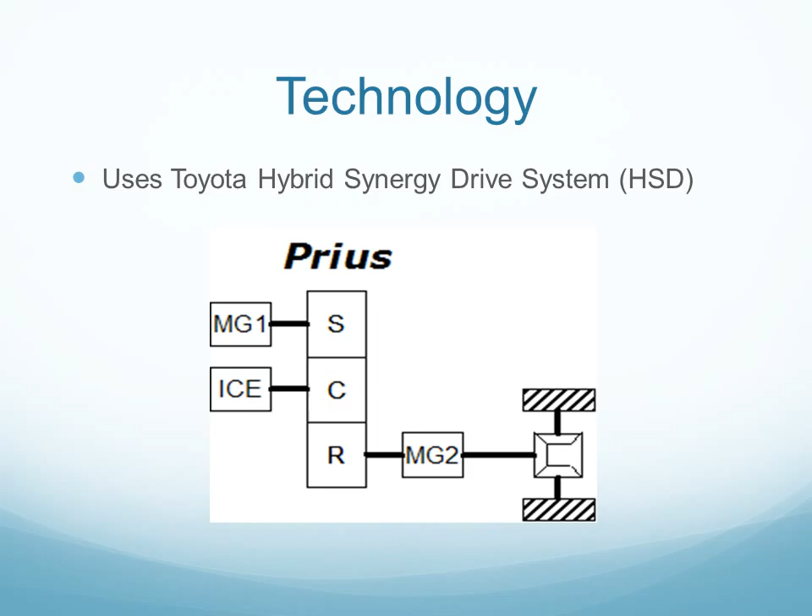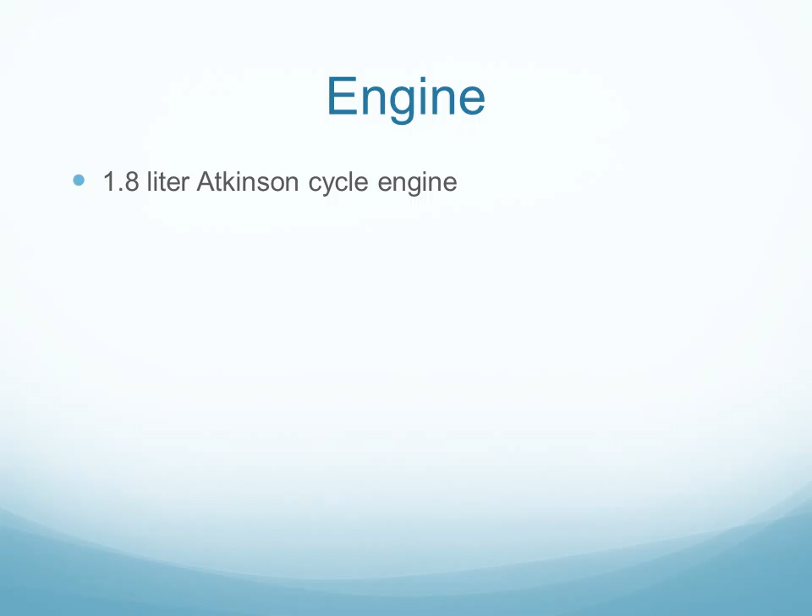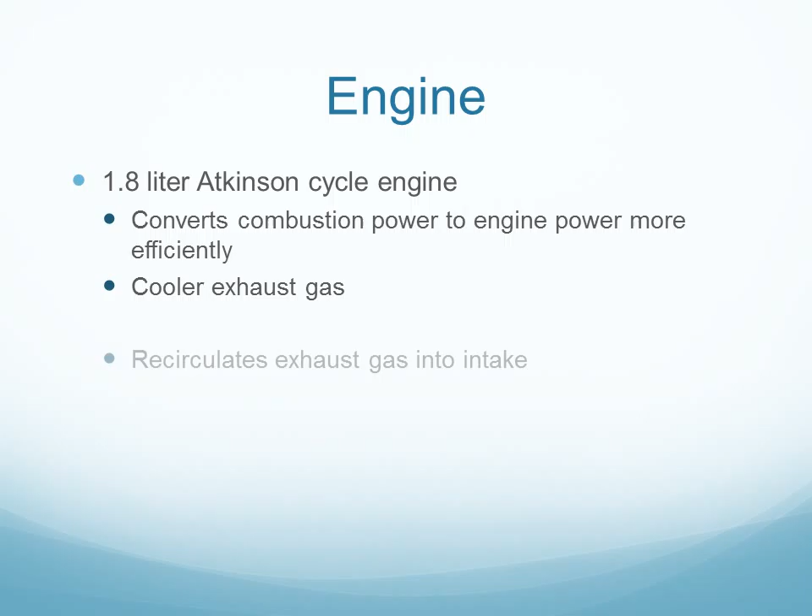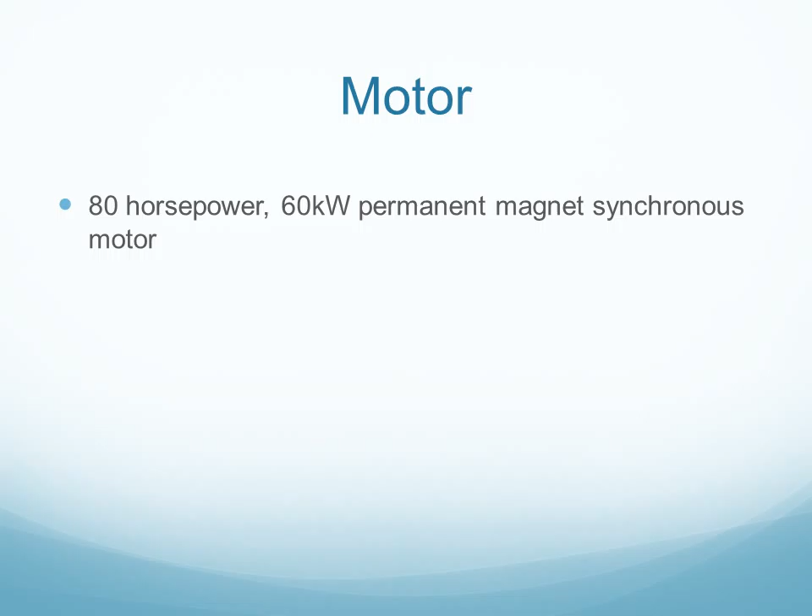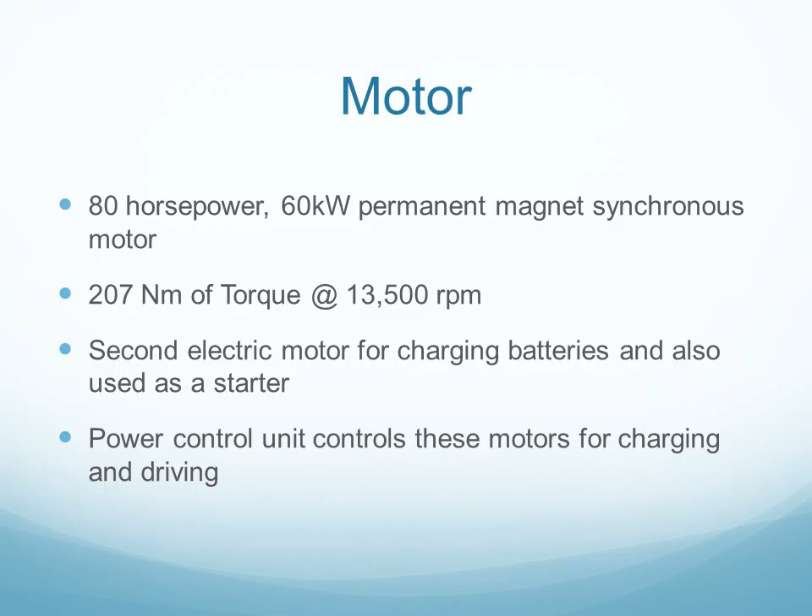The Toyota Prius consists of two electric motors. The first motor is the main drive motor, which is an 80 horsepower, 60 kilowatt permanent magnet synchronous motor. It is capable of producing 207 newton meters of torque at 13,500 RPM. The second, smaller electric motor is for charging the batteries and also used as a starter to start the internal combustion engine when it is needed. The power control unit intelligently controls these two motors to either put it in charging mode or drive mode depending on whether you are slowing down or speeding up.

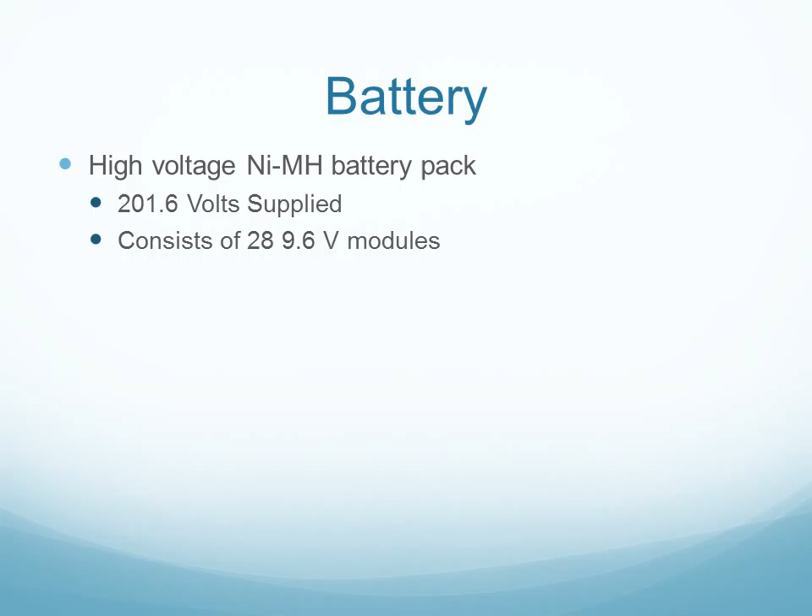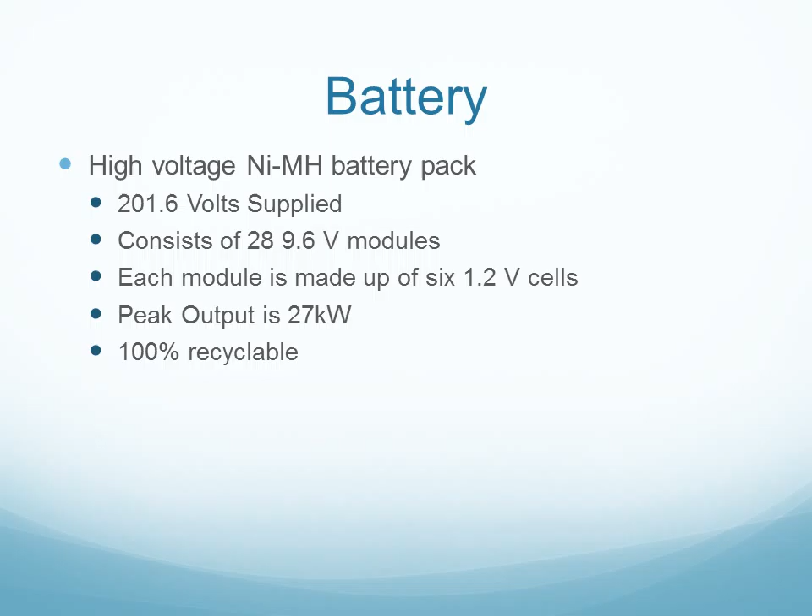The other major unit in the Prius is the battery, which is a high voltage nickel metal hydride battery pack. It produces 202 volts of electricity, which is stepped up to 650 volts by the electrical circuit, which consists of 28 9.6 volt modules, and each module consists of 6 1.2 volt cells. The peak output is about 27 kilowatts, and these batteries are 100% recyclable.

The next type of vehicle we're going to talk to you about today is the plug-in hybrid vehicle. The plug-in hybrid vehicle is a type of hybrid vehicle where instead of using an internal combustion engine to charge the batteries, you can just charge the batteries by plugging them into the wall. It has both an electric motor and an engine, just like the hybrid. Most of the time the electric motor is used for driving, and the engine is usually smaller than a hybrid vehicle and is only used to charge the batteries when the charge level in the battery reaches its minimum level.

Next we're going to talk about the Chevrolet Volt. As you can see, this vehicle is a full electric vehicle with extended range capabilities. It uses electricity as a primary source of power, and when it runs out, a gasoline engine kicks in to charge the batteries. It was first introduced in 2010 in the United States, and it will be available in mid-2011 in Canada.

And today we will talk to you about hybrid vehicles and electric vehicles.

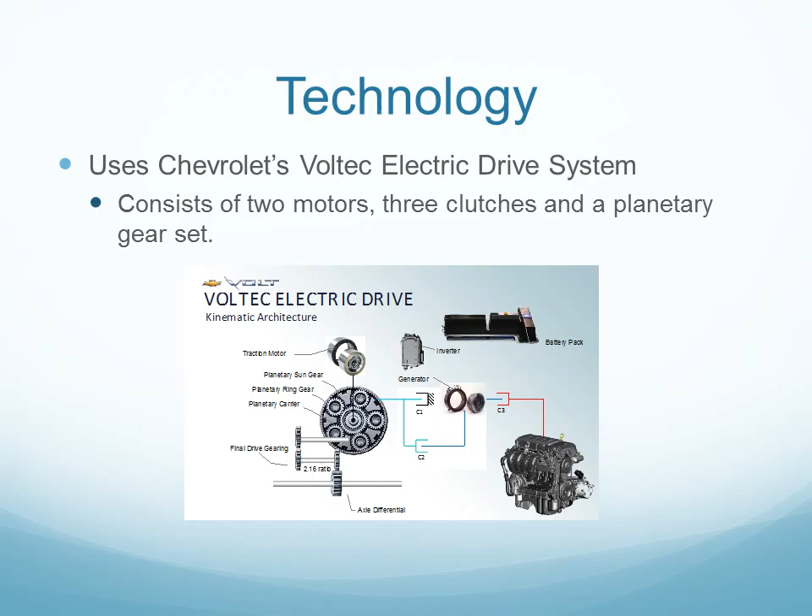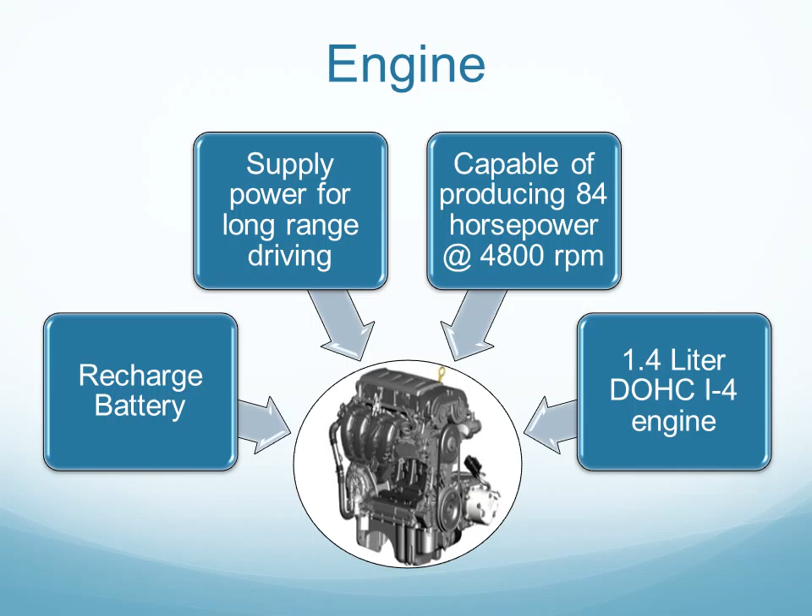The Chevrolet Volt engine is a 1.4 liter double overhead cam I4 engine. It's capable of producing 84 horsepower at 4,800 RPM, which supplies power for long-range driving and also recharging the battery. The Chevrolet Volt has two electric motors on board. The main drive motor is a 173 horsepower synchronous motor. It can produce up to 273 foot-pounds of torque. The second small motor is used as a generator to charge the batteries.

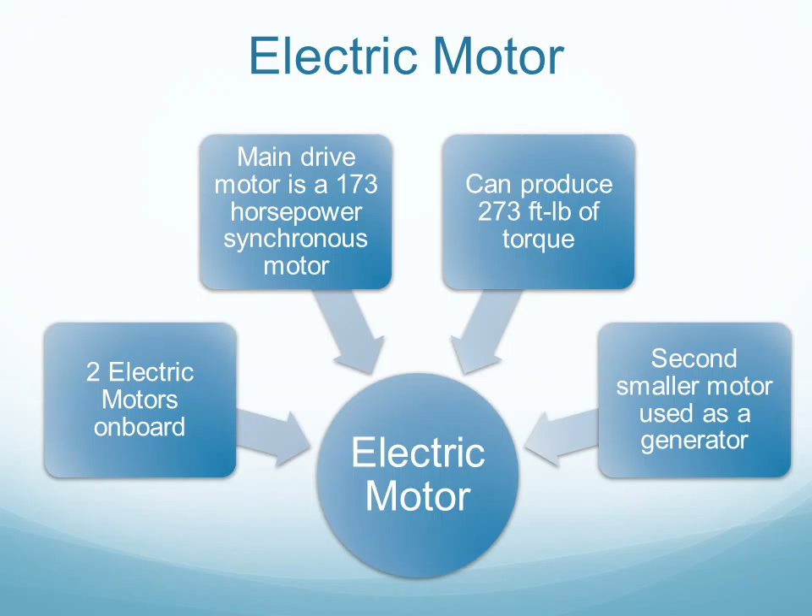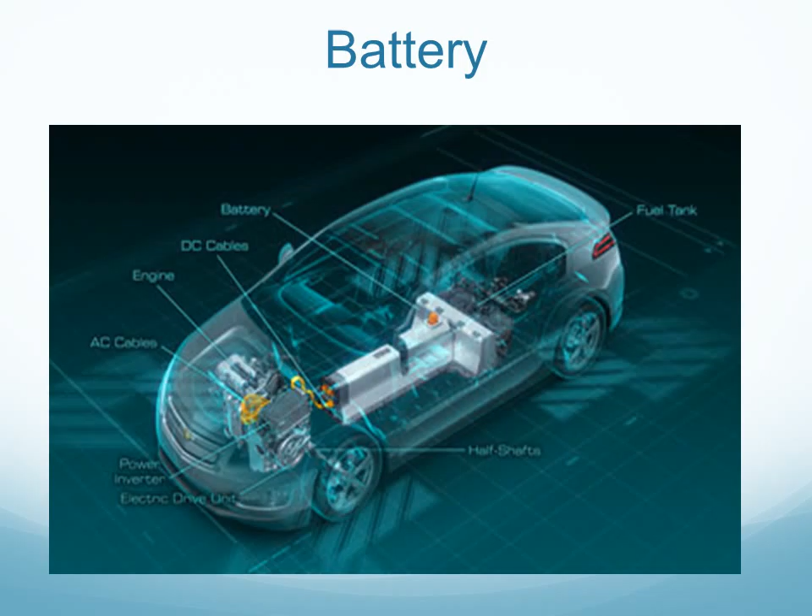The single biggest component in the Chevy Volt is its battery. As you can see, it is in the center of the compartment and it is a T-shaped battery. It is a lithium-ion battery and it is made of 288 prismatic cells put together. The battery on its own weighs 375 pounds, which greatly reduces the efficiency of the vehicle. It can store up to 16.6 kilowatt hours of energy.

Now we can talk about the electric vehicles. An electric vehicle is a vehicle that uses electricity as its only source of energy. The first electric vehicles were made in the late 19th century. However, they didn't proliferate because of cheap gasoline prices for the ICE. It uses an electric motor for its propulsion and is capable of going a longer distance than the plug-in hybrids on a single charge. Also, its tailpipe emissions are almost zero.

Hi, my name is Ritesh, Hi, I'm Kulwant, and today we will talk to you about hybrid vehicles and electric vehicles.

The electric motor for the Tesla Roadster is a three-phase, four-pole synchronous motor. It is capable of producing 248 horsepower and 200 foot-pounds of torque over a wide range of RPM, approximately 0 to 6,000 RPM. No transmission is required because of this wide torque band. The efficiency of the electric motor was calculated at 88%, which is 3 times more efficient than any engine that is available today.

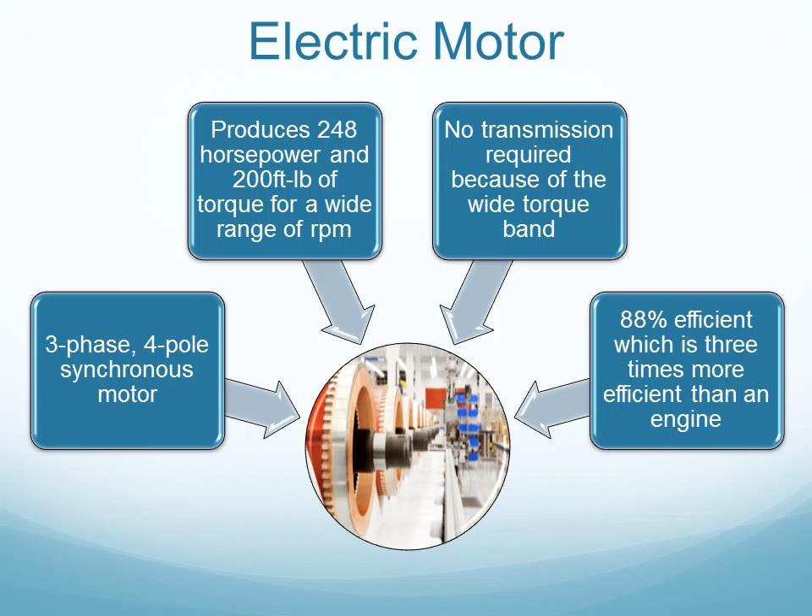Power electronics are the main brain behind the Tesla, which controls power flow between the batteries and electronic devices. It has 3 stages: power stage, controller, and line filter. The power electronics consist of 2 processors. The first one makes the decision on whether to charge the battery from the charge port or from the motor. The second one is a safety feature that checks current flowing in the motor and compares it with the throttle position.